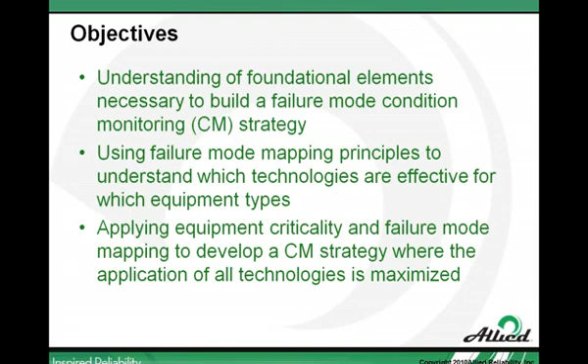This is really important because we want to have an effective strategy. For those of you who were on a couple of minutes early listening to me and Gary discuss a couple of reasons why we buy equipment that ends up laying on our shelf, we definitely want to avoid that. So that's the objectives, and what we're going to talk about next are the foundational elements: equipment hierarchy, the asset catalog, and attribute information that's necessary to build our strategy.

We're going to talk briefly about equipment criticality, what it is, why we need to do it. We're going to discuss some failure modes analysis techniques, all the way from classical RCM to the failure modes mapping exercise principles, as well as the asset health matrix. And we're going to talk about some of the requirements to build that asset health matrix.

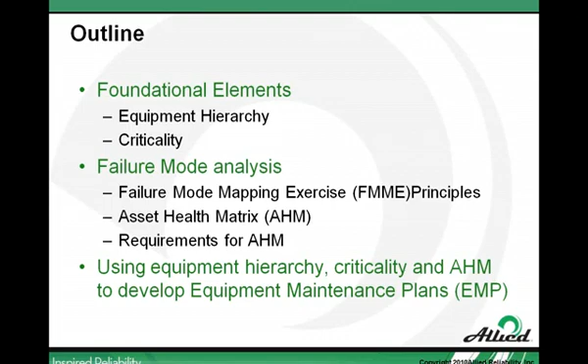The asset health matrix is the basis for what we're going to derive our condition monitoring strategy around. So we're going to take that equipment hierarchy, criticality, our asset health matrix, and develop equipment maintenance plans. These include which inspections we're going to do that allow us to detect failure modes early, before they become functional failures, so we can enact planning, scheduling, and work execution to address those failure modes before the equipment is at real risk of failure. That's really the end game of leveraging PDM or condition monitoring.

Gary, real quick, I know we're recording, so I apologize. During the presentation, I assume this is just going to be myself speaking, and then we'll open up questions and answers afterwards? Yes, Carey. Okay, if people drop some questions I'll interrupt you in the interim, otherwise I'll let you go and we'll interrupt if needed. Okay, well the presentation should take about 45 minutes or so, depending on how much I jabber. So I'll get through this and we should allow plenty of time for discussion afterward, which is what I really want to get to.

Perfect. Okay, so first we're going to talk about equipment hierarchy. The purpose of the equipment hierarchy is to arrange our plant and our processes into a graded structure. In other words, we arrange our equipment and systems into a structure we can use to track equipment failures, track cost, downtime, and this also allows us to manage spare parts, work instructions, and work management. This is very important when designing our PDM program and putting these strategies into play and managing work. The hierarchy and our equipment catalog are the most foundational elements.

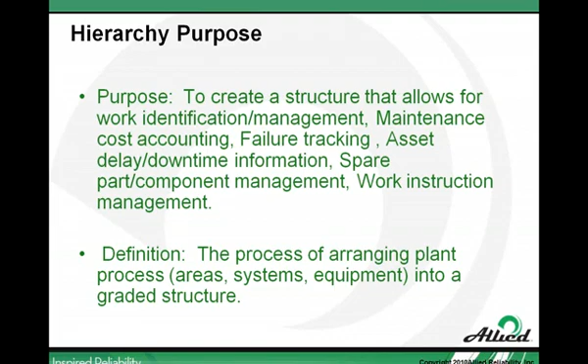So this is probably the most important, but unfortunately also the most neglected. I cannot stress enough the importance of getting our database, our equipment list, and that attribute information arranged properly, and collecting all of that information so we can build a good strategy. The best part about the hierarchy and equipment list is this doesn't really take a lot of high-end ability. All it takes is some dedication and manpower out in the plant to collect this information and validate that it's correct.

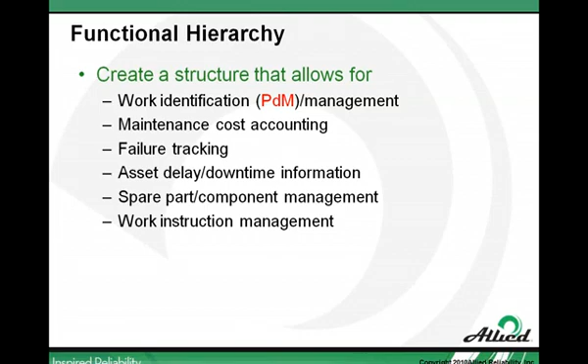So a functional hierarchy -- what we mean by functional is we create a structure that allows for good work identification and PDM management. We're able to accurately account for maintenance costs, not just as a whole, but understand where we're spending our money. The same with failure tracking -- we understand which equipment or systems are causing the most trouble and where we need to spend our effort. Likewise for delay or downtime information, this allows us to streamline and manage our spare parts management, and for planning and scheduling, this allows us to effectively plan the schedule. So these are all the things we expect to see, and when we say functional hierarchy, these are the processes that are enabled.

So asset validation. Once we've arranged our plant into a logical order, then we're going to collect all of the data and information about our equipment and our systems. This enables all of our subsequent processes that we're going to develop in order to derive our equipment maintenance strategy. So basically, the asset validation is just defining our asset list.

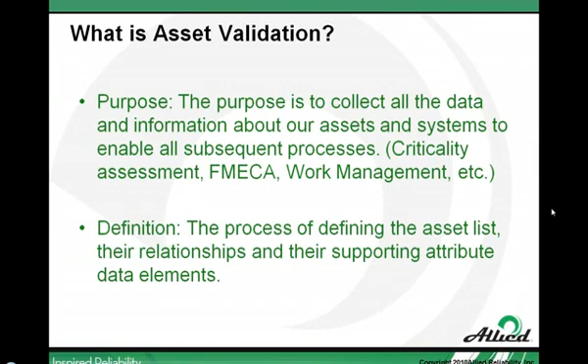Their relationships, so how they're related to each other in a systemic sense, as well as the supporting attribute data elements. And when I say supporting attribute data elements, what we mean is the information about the machine that we need to know to determine what failure modes exist, what parts are in that machine. So we're talking things like bearing numbers, gear tooth counts, motor frame size.

These are all things that for the folks on this presentation who are PDM practitioners, immediately go, yes, this is information that I need to know because I need this to build an accurate database. This is also information that we need to know to understand how our equipment fails so that we can properly apply the proper technology to the appropriate failure mode.

So the benefits here are that we're going to verify which assets we actually have in the field. We're going to gather that information to be able to build our subsequent processes. The data scrubbing means we know we have accurate data. And the important part for the purpose of this presentation is that we're going to have accurate technology database building.

And what that means is that we're going to, when we apply the technology, not just apply the appropriate technology to control the right failure mode, but also an understanding of what components and what parts make up those components, so that we're able to build the appropriate collection specifications and alarm limits for each applied technology so that we will get the results that we expect.

In other words, what we're trying to do is apply the technology so that we can identify defects as early as possible. And so we need to have that understanding of what makes up our equipment. This also assists in our criticality process, which we're going to speak about, and validate the hierarchy in the plant.

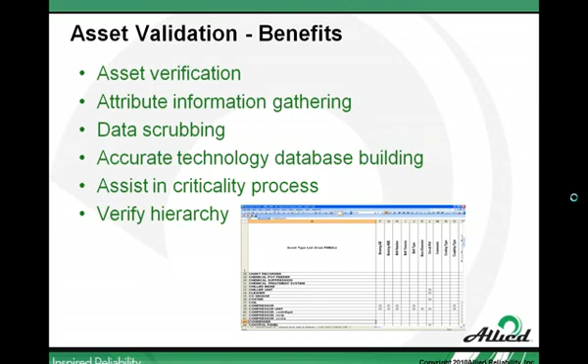The next step in the process to be able to build a good maintenance strategy is to perform criticality analysis. The criticality analysis is going to help us define the appropriate equipment maintenance strategy, and it's going to do that by arranging our pieces of equipment and our systems in the plant into a ranking where we have a relative understanding of the importance of each piece of equipment in the plant.

Typically how we've built PDM programs in the past, and I'm going to oversimplify, but typically what we've done is walk through the plant and go, okay, this one, not this one. We better do this one. We're not sure about that one, we'll wait and see. Or even worse, what happens is a piece of equipment runs to failure, and we react emotionally and say, well, we must need a PM or a PDM on this piece of equipment.

And so without an understanding of whether or not it should be included through a strategy, we just throw it on the list. So the criticality analysis helps us take the emotion out of this process and rank these machines so that we understand where we should apply our strategy up front.

This is also a foundational element for other processes, for planning and scheduling. We can arrange our backlog and attack the most important pieces of equipment first. If we go into a lubrication excellence strategy, we understand which pieces of equipment are most important to include in that. And obviously our PM-PDM program design.

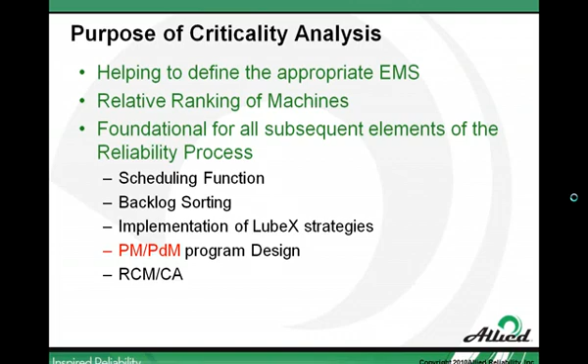So what criticality analysis will do is take each function within the plant - operations, maintenance, safety. This is tailored to the business needs of each individual type of production environment. We're going to have a series of questions and answers with scores applied to those answers that cover all of those different aspects of what makes our equipment more or less important.

So as well as the environmental impact of equipment failures, the safety impact, how much it costs to maintain that equipment, the impact of downtime, the availability of spare parts, and redundancy of equipment. This way, instead of it only being a maintenance-only type of function, every function within our manufacturing environment has had an opportunity to have input as far as what makes a piece of equipment more critical. So instead of an environment where you have competing objectives, all of our business processes are aligned within our plant.

So this is why we do this, and these are the different functions that are included. We determine the ranks of these assets by this quantitative assessment. This tells us where we're going to focus our maintenance reliability efforts, because through that process we have identified the most important piece of equipment. And since all of the different business disciplines within our manufacturing environment participate, this creates a baseline where we all agree. We have now what we call a common understanding of what is most important, so one discipline doesn't pull harder than the other because of the facilitation where we've done the criticality analysis.

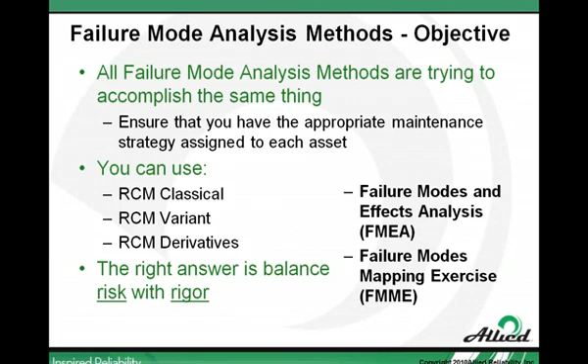And with each one of these methodologies, we're looking at the risk or the consequences of equipment failure - in other words, the unacceptable consequences of those equipment failures versus the resources and cost of each of these methodologies. So understanding these failure modes is what's going to dictate the preventive and predictive strategies. If we're performing a task that does not have the ability to identify a failure mode, is not regulatory or statutory in requirement - something required by law or statute - or it does not prevent a failure mode, then we are wasting our valuable craft time.

And the reason we bring this up is, as I go to different facilities and manufacturing plants and have these discussions, the one thing that maintenance managers and maintenance folks in general don't have enough of are two things: money and people. What we're trying to do through this approach is optimize that limited resource that we have, our budget and our people. So this is also one of the most important steps, because quite frequently we're doing tasks and we believe we're doing the right thing, but we don't necessarily know that we're controlling the failure mode.

So this approach allows us to validate that we're doing this to the right piece of equipment, controlling the right failure modes, but we also document this so we can show what our plan is. This is a very important step as well.

Carey, I hate to interrupt, but do you have any feel for how much time or effort people spend where they're applying efforts but cannot identify a failure or failure mode?

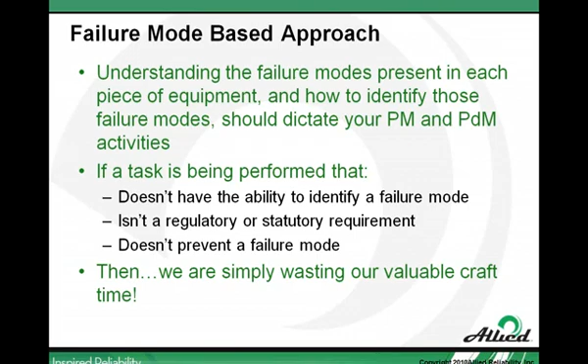So if we go back and take a quick high-level view of our own strategy, and look at the man-hours dedicated to PM versus man-hours dedicated to PDM, and understand that balance and what it should be, that allows us very quickly to understand whether or not we're in line with that type of philosophy.

So going back a bit to follow up further on this question, Gary, here's a little of what the classical RCM looks like. If we're doing the full-blown classical RCM, we need an outside subject matter expert to facilitate, and we're bringing half a dozen people or so into a room.

We call RCM a resource-consuming monster a lot in the industry, because you're talking up to a month per system, and we're also talking about $30,000 to $50,000. So we're talking about something we don't do very much of because of the cost - we're only going to do this on the most critical systems.

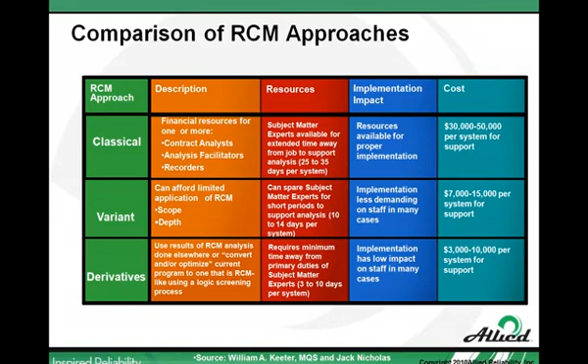As you can see, we have other methodologies we can apply that take less time, but are still a significant outlay of resources as well as money. So this leaves us needing a solution for what I call the balance of plant.

So what we want to do is apply failure mode mapping. Failure mode mapping is simply: I have an equipment type where I've performed failure modes and effects analysis. In other words, looking at our example of a pump - I know a pump has a motor, a coupling, and a pump.

Those are the components in that system - a motor starter, don't let me forget the electrical side. Each of those components are made up of parts. So the motor is made up of windings, rotor, bearings. The pump is made up of the impeller, bearings, shaft, housing. Each of those parts have failure modes.

That failure modes and effects analysis, once I've used it on a centrifugal pump coupled with a flexible coupling, I can apply to all the pumps in my facility. And by knowing which failure modes exist in that pump, with an understanding of how the technologies work, I can apply and say, for this failure mode, these technologies might apply.

This leaves me with a matrix where basically I have a check mark in a box that says, for a centrifugal pump - I'm sorry, I've got a misprint here, Gary, I apologize, ultrasound should be checked for every one of those, for UE systems. But the matrix is simple - I put a check mark in the box for each of those technologies that could apply.

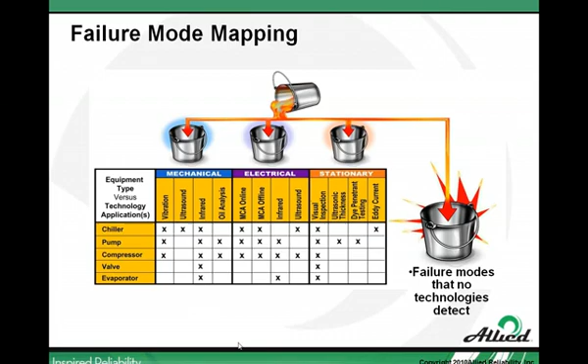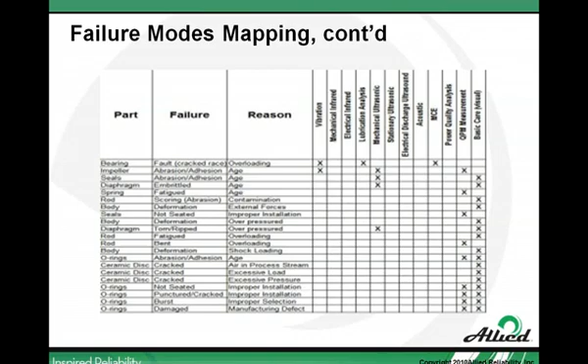I can use that. Here's a different example that actually shows the failure mode. For this part of a bearing, I have a fault of a cracked race due to overloading, so I can use the following technologies for that failure mode.

I'm going to jump ahead a few slides to talk about failure modes, then back up. Typically, the way we address failure modes is that a failure mode consists of three parts: the part, the failure, and the reason.

In our example, going up the hierarchy, we have the equipment. Indentured to the equipment are the components. So the piece of equipment is a centrifugal pump, and the components would be the motor, the pump, the coupling, etc. Those components are made up of parts.

The component is usually what we call a line replaceable item, something we stock in the warehouse but is still repairable. A motor, for instance, is a repairable item made up of parts. The definition of a part is the lowest unit of common disassembly. A bearing is usually the lowest common unit of disassembly—we don't repair a bearing, we change it. We don't pull it apart and replace rolling elements, we just change the bearing, so that makes it the part.

When we get to the part, that's where we have the failure modes. If we put real-world information into this example: we have a boiler feed water pump, a component of that pump is an electric motor, that motor has a rolling element bearing, and the failure mode is that bearing, the part. The failure is fatigue, and the reason is overload.

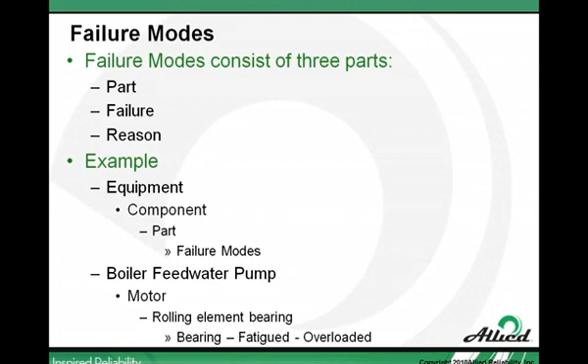I combine this with knowledge of how the technologies work, and I can create that failure modes mapping. This allows me to create what we call the asset health matrix, where I have the failure modes mapping library in the background, and my equipment arranged in its hierarchy and criticality. Now I understand what technologies could apply, and the second step is deciding what technologies I will apply.

This is a tool we use to design and improve our PM and PDM program. Since this is a database, I have an at-a-glance view of what PDM technologies and PM tasks I'll use to address specific failure modes in my assets in my plant. These technologies and tasks—meaning PMs—are assigned based on the known failure modes of the different components and parts of those pieces of equipment.

So what do I need to build an asset health matrix? I need the plant area, the equipment ID, the equipment name, and the equipment description. This is why the foundational elements of the hierarchy and the asset validation are so important—I cannot build the asset health matrix unless I have this information and it's accurate.

I also want a description of the piece of equipment and the equipment type. This also comes from the asset validation step.

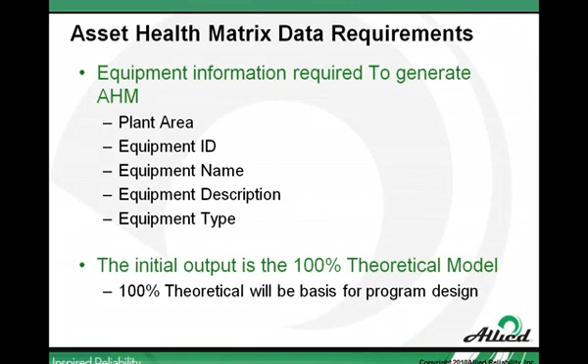So we need to understand, and this is where we'll get into which technology applies to which failure mode, and what we need to do depending on our maturity to create a sound strategy that we can execute.

So we start with a 100% theoretical model. Gary, I did a little bit better job of marking where ultrasound applies here. Thank you. You're welcome, I'll make sure to update those slides for future use.

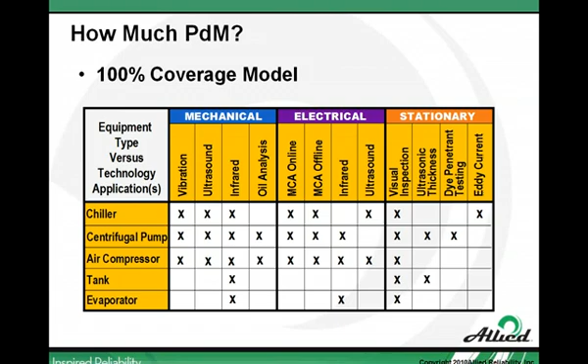So this is my database. This is my starting point. Now we start to have a discussion of where we go and where we want to be.

This is just a little bit of an example of why we're doing this. The more pieces of equipment we have dedicated to these types of inspections, in other words, the more failure modes we're addressing, the lower our maintenance costs. On the y-axis is RAV, replacement asset value, which is how we calculate maintenance costs into a uniform metric: the amount of dollars we spend on maintenance versus the value of the facility we're maintaining.

That's a generally accepted metric for measuring maintenance costs. But what we're saying here isn't necessarily that one technology is better than another. You'll notice different ones slope to different areas; this just happens to be the amount we can apply. You'll notice IR electrical, for instance, ends at 100%. Most of our equipment has electric motors and electric starters, so infrared electrical and ultrasound electrical can be applied to 100% of our pieces of equipment.

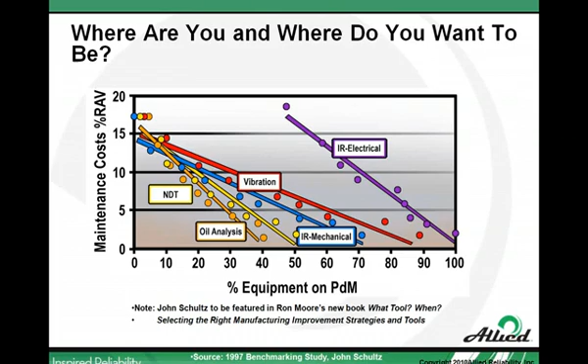Whereas oil analysis only applies to a certain number of pieces of equipment that have an oil lubricated sump, so it's a lot fewer by percentage. What we're trying to take from this is basically simple: more is better, with the caveat of what we can execute.

Real quick before we get in, the last thing we need to talk about with any PDM technology is how it works. This is one of the most important concepts we need to understand and apply: PDM works through early identification of defects.

I'll tell a quick story: I got my start as a vibration analyst. The very first time I made a call with vibration analysis, my big concern was whether this bearing would be bad enough that my peers, the millwrights, the group I came from, would see a bad bearing and believe my technology. That's not really the appropriate philosophy, because by the time I had written a work order, any old fool could have told you the bearing was bad. So basically I'd use a $20,000 instrument to sit and stare at a bearing defect until we really didn't need vibration analysis anymore.

In applying predictive technologies, it is very incumbent upon the people administering and performing that work that the very moment we understand what the failure is, the very moment we've detected a bad bearing, high resistance in our motor windings, whatever the fault may be, that we report that and get it into the work management system, allowing the work management system and the equipment criticality analysis and our processes to take care of when we execute the work.

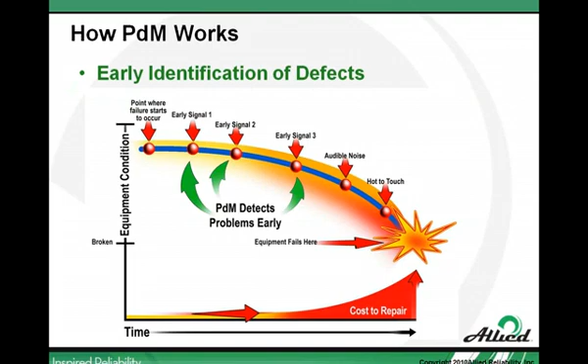It's not going to get any better. It's not going to heal itself. It's now time for me as a predictive specialist to make the recommendation, make an accurate classification of the fault, enter a work order, and allow the work management system to handle when we execute the work. So we really need to pay attention to that concept: the number one thing our PDM does for us is it gives us time. That's the first thing PDM gives us, time to be able to deal with these issues. So it's very important that as soon as we recognize what the fault is, we make a recommendation.

So now we're going to talk a little bit about actually what the title is. We're going to talk about selecting the right technology, how we're going to build the strategy. As we said before, the asset health matrix, the 100% theoretical model, shows which technologies could apply. For higher critical equipment, it's going to be appropriate that we apply multiple technologies to detect all of the failure modes in those pieces of equipment.

The reason for this is because on the high critical equipment, the consequences of those failures result in an unacceptable condition. What we mean is this could cause an environmental issue. Most commonly, it causes excessive downtime, and the monetary impact of that failure on our production rate is unacceptable. So what we need to do, through our inspection strategy, is cover every known failure mode, so we can identify those early, let our work management processes kick in, and deal with those defects and remove them before there's any risk of failure.

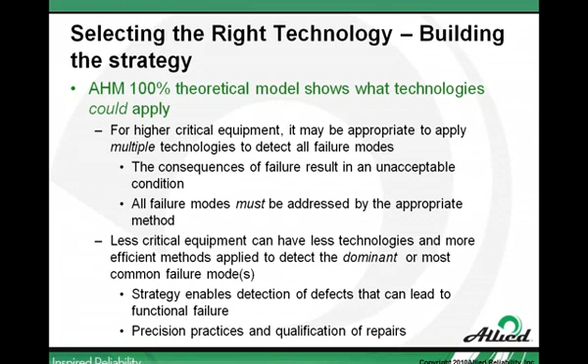So all of those failure modes must be addressed on our higher critical equipment. On the less critical equipment, we can use fewer technologies and more efficient methods, because typically we're looking for dominant or most common failure modes on our lesser critical equipment. There's still an impact to that failure, there's still value for continued operation, but we can achieve our results with a little bit less of a comprehensive strategy. This enables detection of defects that are going to lead to functional failures and also leads to improvements in our precision practices and qualifications of repairs.

So we're going to go into an example, we're just about finished up with the presentation. We're going to look at a story of two pumps here. So our 100% theoretical model for a centrifugal pump: we have a component configuration of a motor starter, an AC induction motor, a grid coupling, and a pump.

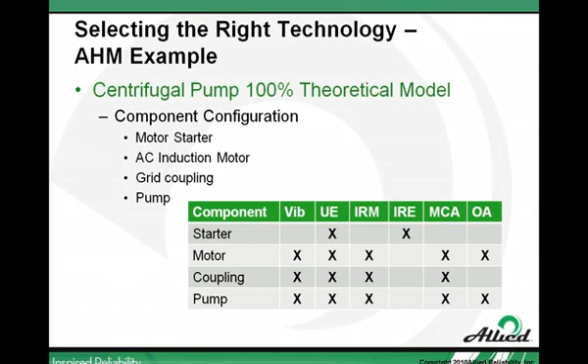As you can see here, on our failure modes mapping exercise, vibration will apply for the motor, coupling, and pump. Ultrasound can apply to all of the components of this pump. Infrared mechanical, infrared electrical applies to the starter, motor circuit analysis, MCA, and then oil analysis, depending on whether our motor is oil lubricated. So this is our 100% theoretical model. This is what we could do.

So let's look at one pump. Our first pump has a criticality score of 800 out of a possible 1,000, so a very critical piece of equipment. It's a boiler feed water pump. As you can see, I'm going to flash back to the theoretical model and move forward to this pump: we've basically taken the 100% theoretical model and applied it to this pump. The reason is because the consequences of failure are unacceptable, so we are going to throw every technology at every failure mode.

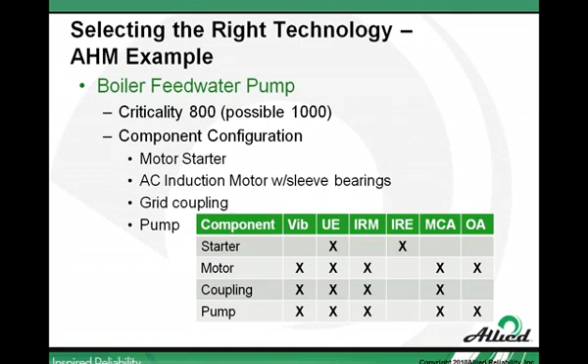The cool part of this strategy, the added benefit, is that certain technologies will interlace with each other and complement each other. For instance, if I'm doing vibration on the motor for the purpose of detecting bearing defects, ultrasound is also going to be a useful technology, and infrared mechanical is going to be a useful technology. So now I've got that synergy of those different technologies that increases my certainty of detection. This is what we're going to do on the most critical piece of equipment.

Well, now we've got a pump, it's a H2O makeup pump. This one has a criticality of about 250.

This one's got rolling element bearings instead of sleeve bearings, but pretty much the same component configuration. But look at my technology deployment on the low criticality piece of equipment.

In this case, I'm not going to do vibration analysis at all. I'm going to use ultrasound, understanding which failure modes I can detect and can't detect, and I'm going to use infrared mechanical and infrared electrical.

I can detect pretty much all of the same equipment failure modes that I can with the other strategy. I might not be able to detect them quite as early in the P-to-F interval, but I still have a pretty good plan around the lower criticality piece of equipment.

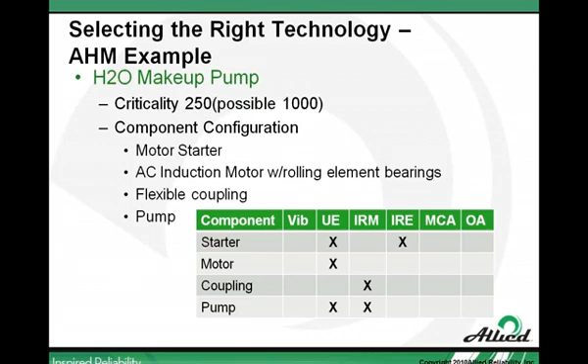And I'm utilizing my resources in a more efficient manner because now I'm using inspection methodologies that are more efficient to apply, and might be something that I feel more comfortable applying as well. So that's the difference between those two situations and a little discussion of which technology we might apply based on those criteria.

Now we get into, and I'll be brief, what we're trying to answer - and we talked about this with the P-to-F interval - is, can we identify a defect that can be eliminated? Is it to the right of point P, where there's potential failure on the P-to-F curve?

If the answer is yes, we're going to write a work order, and for the purpose of what we call asset health, that asset is now red.

Now, if the answer is no, and we've applied all of our inspection methodologies and there's no apparent defect, then that asset is green.

And then my last category is if it's an alarm - in other words, I'm going to use standardized alarms on all of my technologies, but there's no apparent defect - this one is yellow. Basically this tells me I either have a nuisance alarm, or there is an equipment failure that I haven't quite understood yet, and it needs to go one of two directions pretty quickly.

And what asset health is going to allow me to do is understand where I am from the health of the equipment I'm monitoring, so I can forecast a little bit how well my plant's going to run. But from a PDM strategy perspective, asset health is going to tell me when it can be appropriate to expand my strategy.

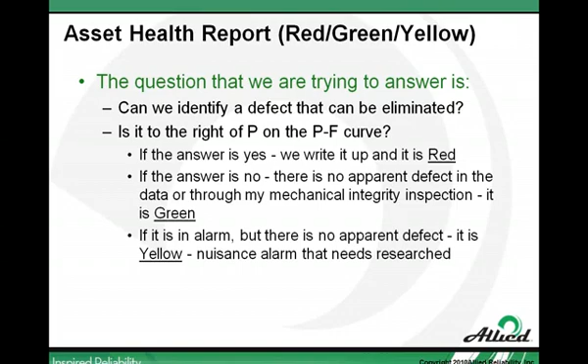And bring more technologies online, and start to bring my strategy more toward the ideal of what I want it to be when I end up where I end up.

So we use benchmark information a little bit to talk about this. For instance, your best-in-class performers have about 88% of their pieces of equipment on vibration, about 70% on mechanical infrared.

And going through - this is a little bit dated, I'll have to update this with the ultrasonic information - basically the same with vibration and ultrasonic, you're looking at on your mechanical side.

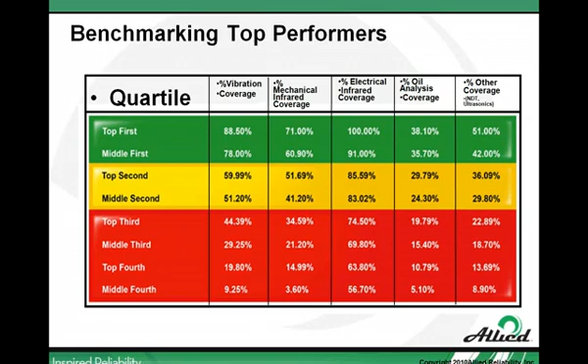So as you can see, in a mature program, you're going to have almost all of your pieces of equipment with some predictive technology applied.

This is where we start to talk about what we call asset health management. Asset health management is understanding the asset health, and then where I want to be from a strategy standpoint.

So I have over here a plant where I can apply vibration to 3,400 pieces of equipment. Well, these folks have an existing coverage of about 220 pieces of equipment. They have about 135 on oil analysis. They really don't have much of a program yet.

But this shows where they need to be when they have a mature strategy, when their resources are built, and when they have the processes that can support this. So for each technology, this shows what that more complete picture looks like.

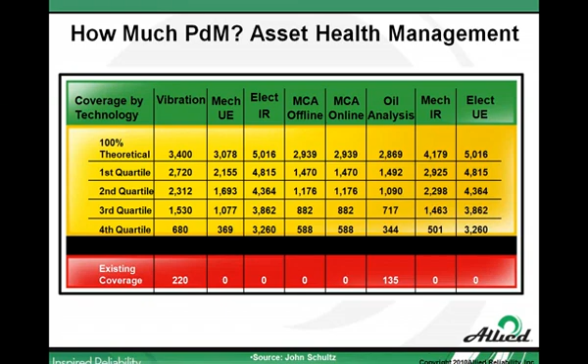The question is, at what point do I add to my strategy? When can I bring more technologies to bear? When can I address more failure modes? I'm going to use that asset health matrix.

So let's say I have a plant, and we'll just say I have 1,000 pieces of equipment in that plant. And I'm going to start with the first couple hundred pieces of equipment.

As I put those pieces of equipment on route and apply that strategy through my asset health matrix, I'm going to begin to measure that asset health. Very simply, the number of pieces of equipment I'm doing those inspections on, what percentage of those pieces have no defect when the inspection is applied.

I'm going to monitor that and set a goal. In this case, my goal is 85% green. So when I get started, I'm going to start with that fourth quartile program, and as I detect those faults and address them and remove those defects from the machinery, my asset health is going to increase. As I repair things I find, remove those defects, and put the right processes in place to ensure those defects don't come back, I'm going to have growing asset health.

At some point, I'm going to reach my target of 85%, and now I'm going to look to see that I can sustain my process. Let's say I want to see 3 consecutive months where I can hold that 85% asset health. In other words, I've met my goal, and now I've demonstrated that I can also sustain it. Now it's time that I can go to the next step in my strategy.

I pull out my asset health matrix and say, let me look at the next group of technologies, or the next group of equipment I want to apply technology to. At the same time, in the background, this is where my training is taking place. I'm getting new PDM technicians ready to go, working with a service provider to understand what I can handle, what I need to outsource, whatever that strategy looks like on the nuts and bolts. This is what I'm doing in the background as we're removing those defects.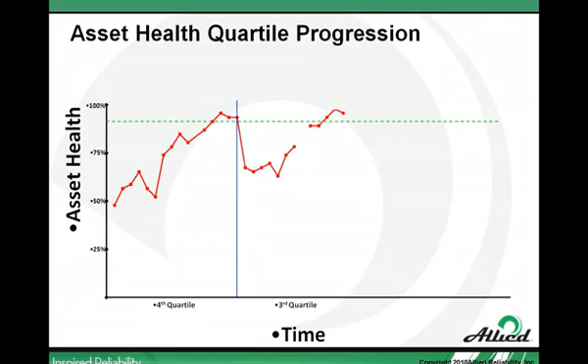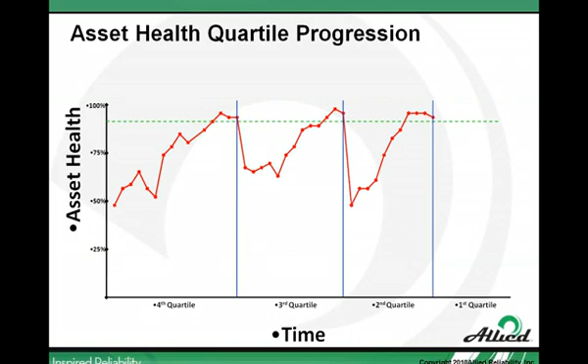So now I add more equipment, I'm going to address more failure modes. My asset health is going to go back down because I'll find more defects, and the process just continues. As we remove those defects, we get back up, sustain the process, add more pieces of equipment, and now we're addressing more failure modes—et cetera, until we get to our end goal where we have a comprehensive PdM strategy.

So the summary: we need to start with the foundational elements. In order to build this strategy, I cannot stress enough, we have to start at the beginning. If we jump in the middle and buy some technologies, what's going to end up happening is we're going to have boxes sitting on shelves collecting dust. That is not a result we want to get out of this process. We want a sustainable process where this becomes part of our everyday life, doing these condition monitoring inspections.

We need to build this strategy based on failure modes. We need to understand in which ways our equipment fails, apply the appropriate technology and PM inspection to control and identify those failure modes. We're going to utilize our equipment criticality, the relative ranking of how important our equipment is, our process maturity, and asset health, where we measure and perform asset health management to determine when we deploy certain technologies and to what equipment.

And then we're going to add technologies and machines to our program as dictated through our asset health management principles. If we follow these basic rules—and these are all concepts that, with a pretty basic understanding of what the technologies are capable of, and a good foundational understanding of equipment criticality—we can build this, set this strategy, and put it into play. This accomplishes two objectives.

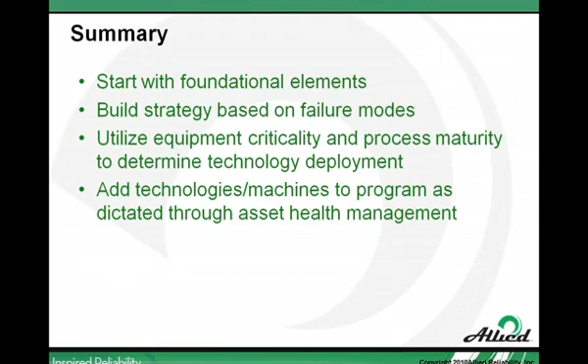First off, when we request resources, this allows us to make our business case and show what our strategy is. If we want our business case to be accepted, and our request for resources to be accepted, being able to show that we've done the appropriate steps and built our strategy based on these steps is going to allow us to get that strategy into play. It's also going to allow us to begin calculating what type of return on investment we can expect to achieve. So this is what we really need to focus on once we get moving.

So that's the end of the presentation as far as that goes. And like I said, not necessarily a discussion of the technologies themselves, but more of a strategic look at how we prepare ourselves to apply technologies, and then how we deploy those technologies through the use of those foundational elements and enabling that strategy.

I guess it's just very interesting to look at this process.

You touched on this, but do you have a way for a company or a plant to get a fix on where they're at, and how much they're applying the right type of strategy to the right equipment? Is there a way for them to start figuring that out?

Gary, it's pretty much this simple. We start from the beginning and get our asset list in shape. That way we can benchmark where we are. So let's say we just want to understand where we are: we take a look at how many pieces of equipment we have in the plant. If we know the equipment type, which most CMMS systems show you, we can build a quick down-and-dirty asset health matrix, or make it even simpler and say, okay, I have 1,000 rotating assets in my plant, and I'm applying vibration to 200 pieces of equipment, ultrasound to 300, ultrasound-assisted lube on X percentage of my motors, and oil analysis on X number of pieces of equipment. That gives you a baseline for where you are.